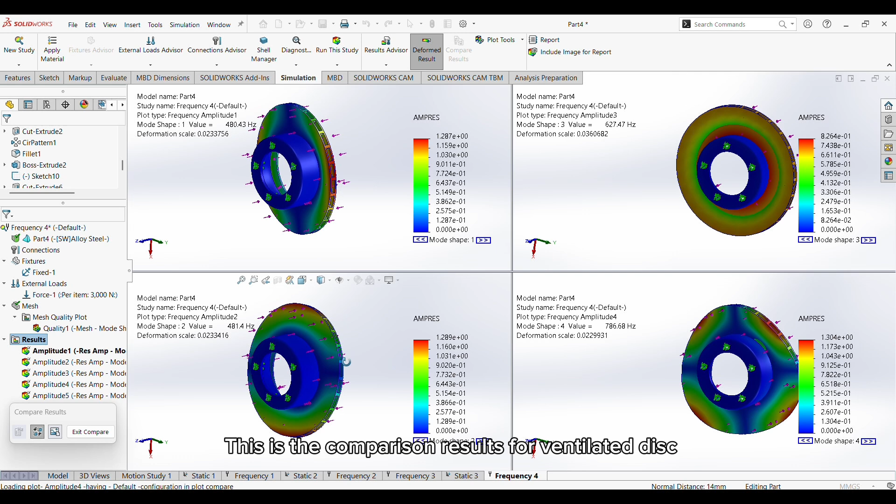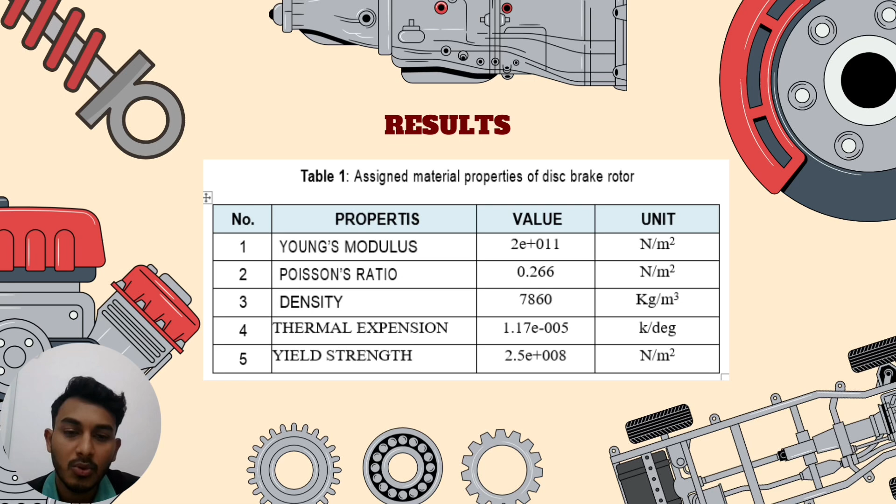Result. Table 1, assigned material properties of disc brake rotor. Number 1, Young's modulus, value 2E+011 Newton per meter square. Number 2, Poisson ratio, value 0.266. Number 3, density, value 7860 kg per meter cube. Number 4, thermal expansion, value 1.17E-005 per Kelvin. Number 5, yield strength, 2.5E+008 Newton per meter square.

Table 2, assigned material properties of disc brake rotor. Ventilated disc brake. Number 1, load 2346 Newton. Outcome: maximum von Mises stress, value 7.851E+007 Newton per meter square. Minimum von Mises stress 4.073E+002 Newton per meter square. Translational displacement 6.211E-002 mm.

Number 2, load 2680 Newton. Maximum von Mises stress, value 8.969E+007 Newton per meter square. Minimum von Mises stress 4.653E+002 Newton per meter square. Translational displacement 7.095E-002 mm.

Number 3, load 3000 Newton. Maximum von Mises stress, value 1.004E+007 Newton per meter square. Minimum von Mises stress 5.209E+002 Newton per meter square. Translational displacement 7.942E-002 mm.

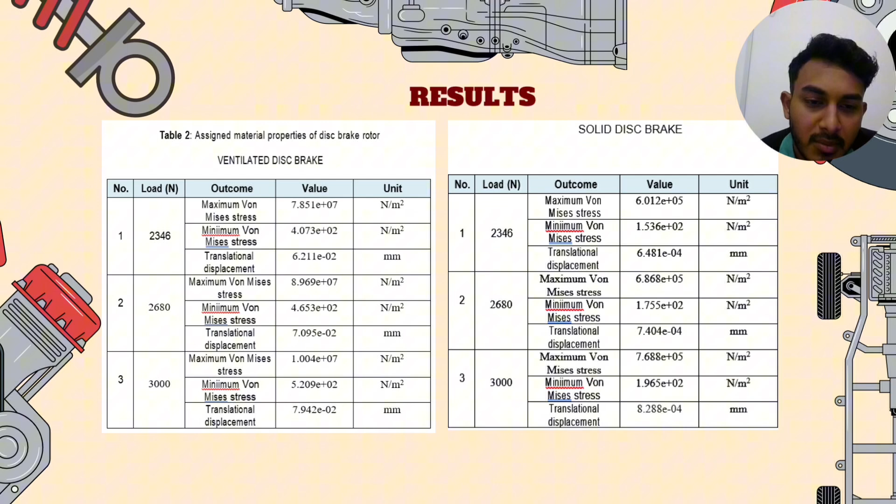Calculate the safety factor. Ventilated disc brake. Number 1, load 2346 Newton. Safety factor 2.5 × 10^8 divided by 7.581 × 10^7 equals 3.3. Number 2, 2680, safety factor 2.5 × 10^8 divided by 8.696 × 10^7 equals 2.9. Number 3, load 3000 Newton, 2.5 × 10^8 divided by 1.004 × 10^7 equals 2.4.

Solid disc brake. Number 1, load 2346 Newton. Safety factor 2.5 × 10^8 divided by 6.012 × 10^7 equals 4.15. Number 2, load 2680. Safety factor 2.5 × 10^8 divided by 6.868 × 10^7 equals 3.6. Number 3, load 3000 Newton. Safety factor 2.5 × 10^8 divided by 7.688 × 10^7 equals 3.25.

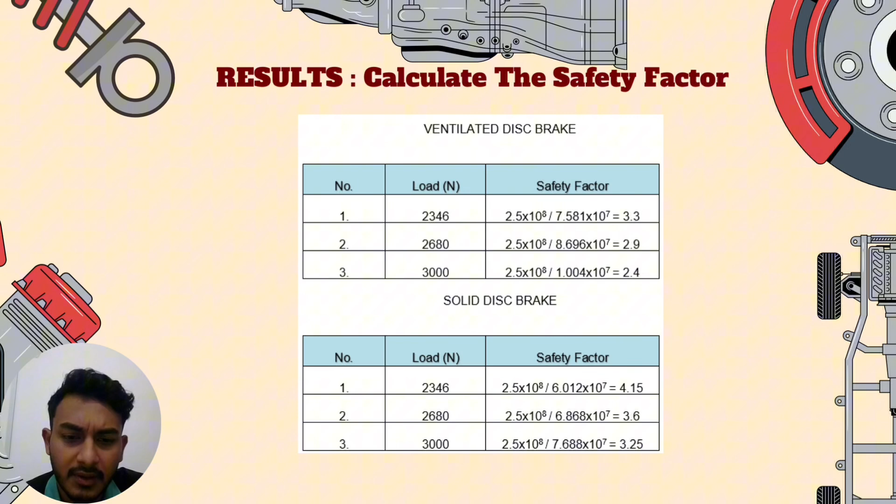Result comparison for safety factor for different rotor geometry. There are aspects: structural strength, thermal performance, weight, design complexity. For structural strength, the ventilated disc has a lower safety factor due to reduced material volume; the solid disc has a higher safety factor due to more uniform geometry. For thermal performance, the ventilated disc has better heat dissipation, and the solid disc has poor cooling capability. For weight, the ventilated disc is lighter than the solid disc, which is heavier. For design complexity, the ventilated disc has more complex geometry, and the solid disc has a simple design.

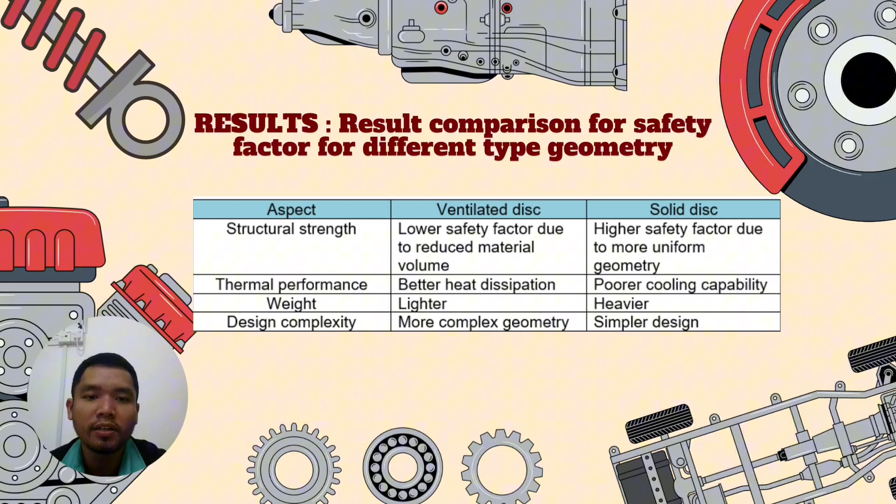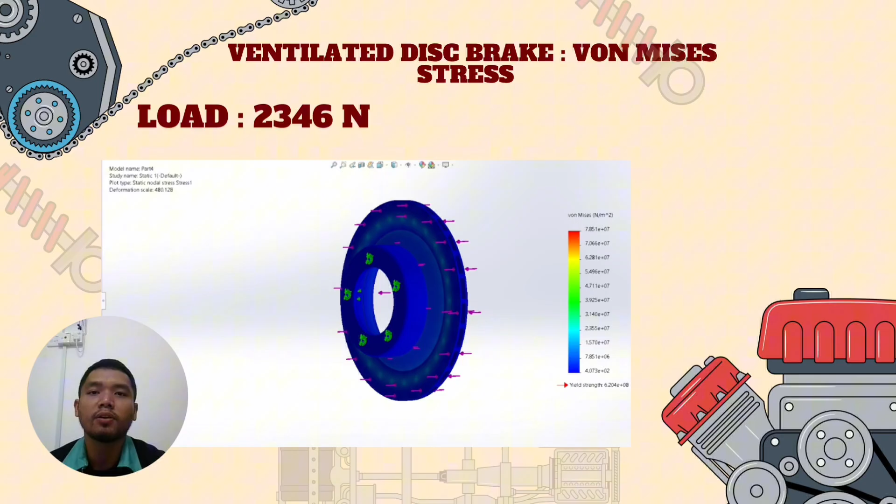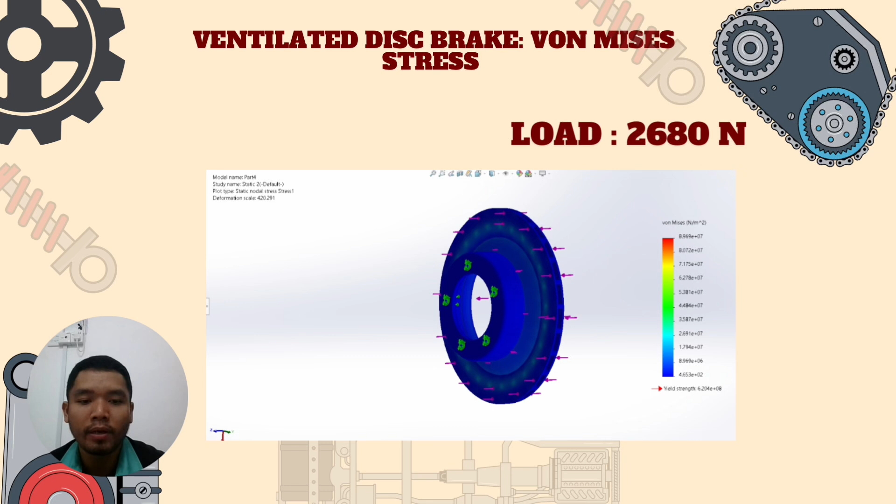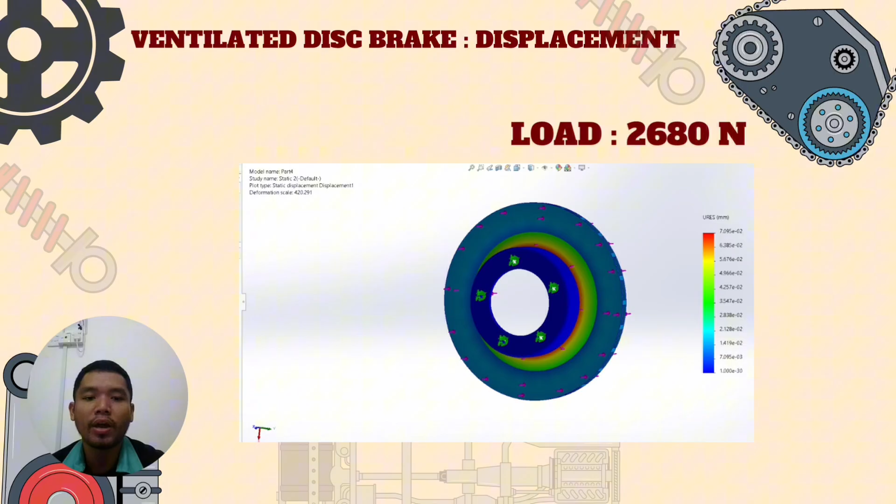Alright. For the displacement for load 2680, the displacement is higher than before, which is expected because the applied load is higher. However, the deformation is still within acceptable limits.

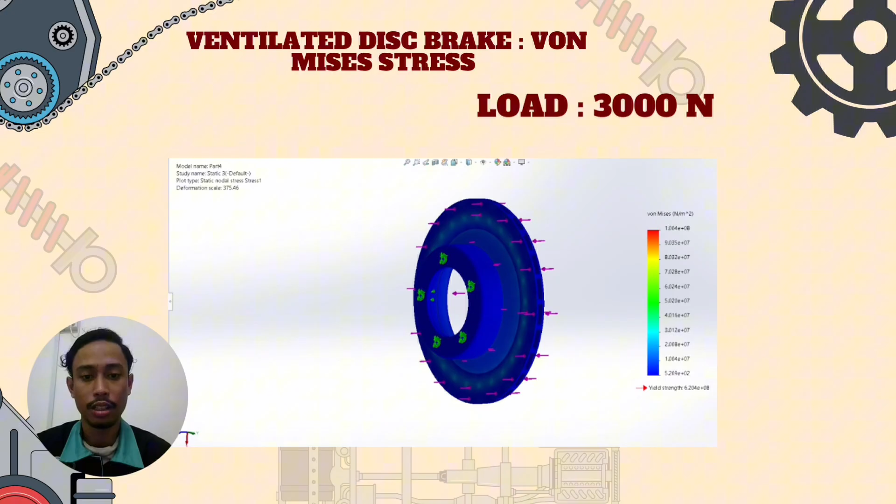Okay, ventilated disc brake with load 3000. At this load, the stress is significantly higher and more concentrated. This helps us understand the maximum stress the disc can experience during heavy braking.

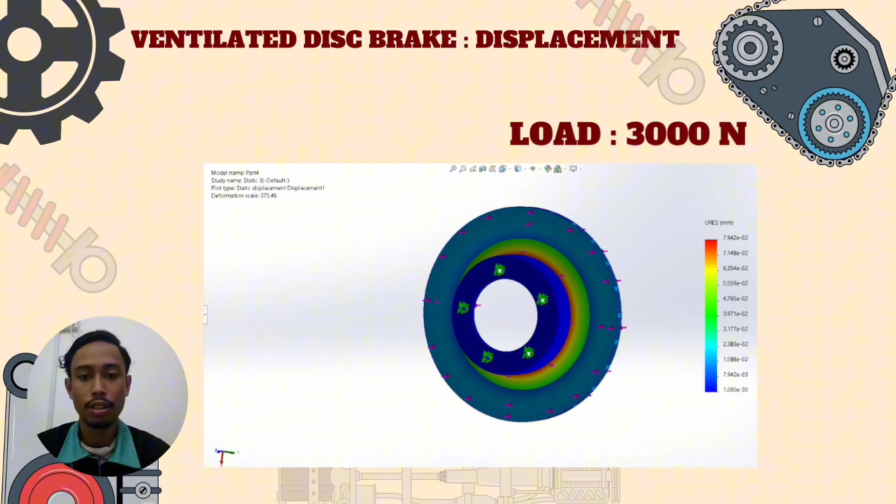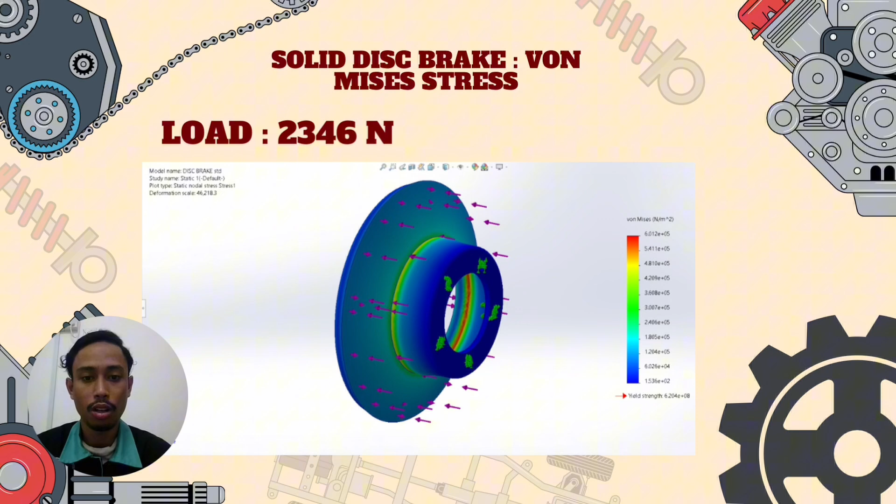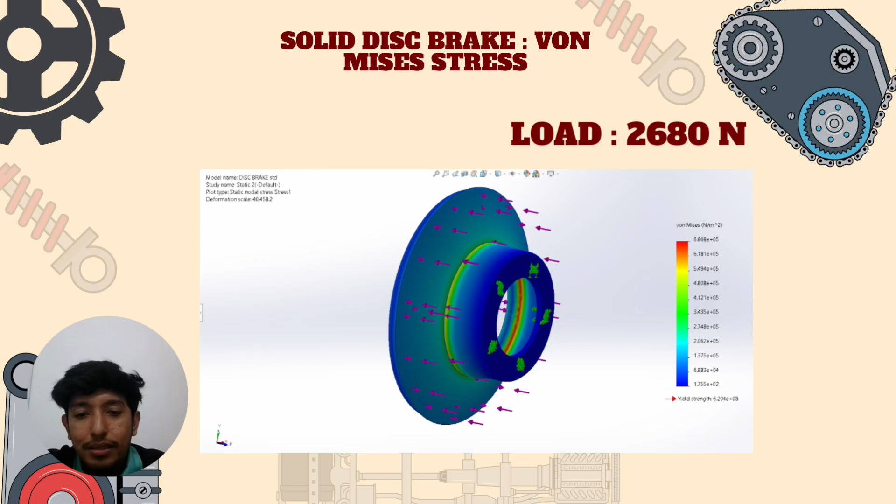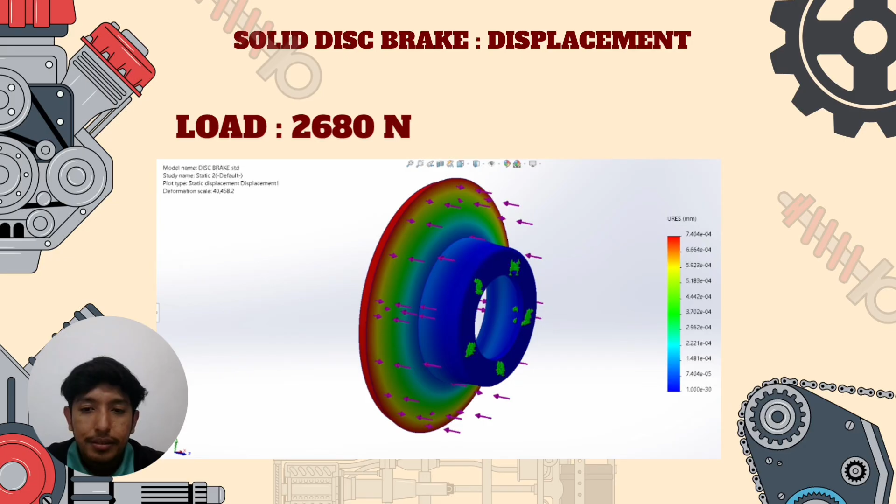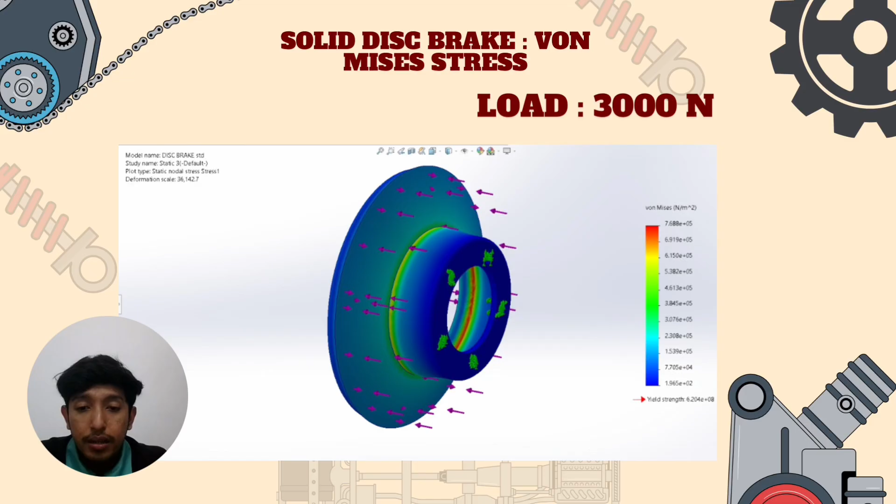Okay, next, this slide presents the solid disc brake under the maximum load of 3000 newtons. The stress level is high, but it is distributed more uniformly compared to the ventilated disc. This explains why the solid disc has a higher safety factor under static load.

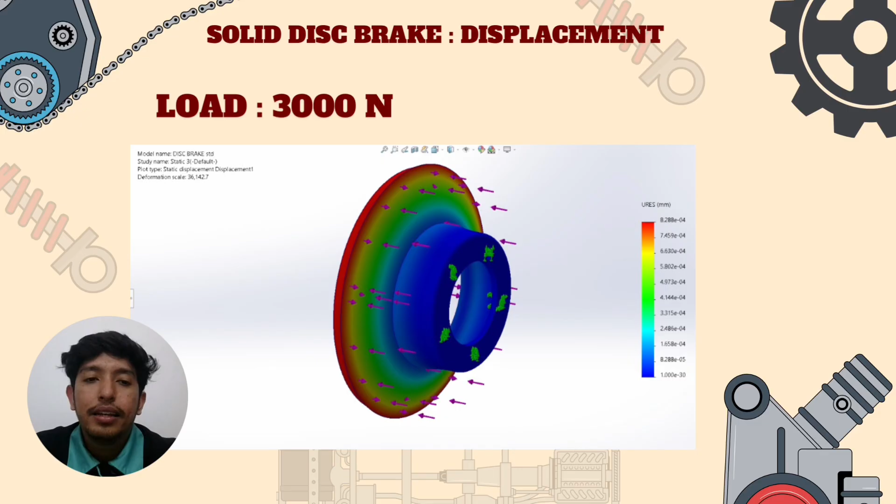Okay, this final slide in the section shows the displacement of the solid disc brake, where we put the load at 3000 newtons. Even at the maximum load, the deformation remains controlled. This demonstrates that the solid disc brake is structurally strong under static conditions.

Discussion for solid disc brake versus ventilated disc brake. In simple terms, the solid disc is strong under static loads because its solid shape spreads stress evenly, giving a higher safety factor, while the ventilated disc shows higher stress due to material removed for the vents.

However, in real braking conditions, the ventilated disc performs better because it dissipates heat more effectively, reducing brake fade and thermal damage. So its lower static safety factor is an acceptable trade-off for better overall performance and durability.

Conclusion. In summary, solid disc brakes are structurally stronger under simple static loads, but ventilated disc brakes perform better in real driving because their vented design disperses heat and reduces brake fade. Although ventilated discs may show lower static safety factors, their superior thermal performance makes them safer and more durable for everyday and high demand use. Any irregular results, such as the anomaly in load 3, should be rechecked to ensure the analysis is accurate and reliable.